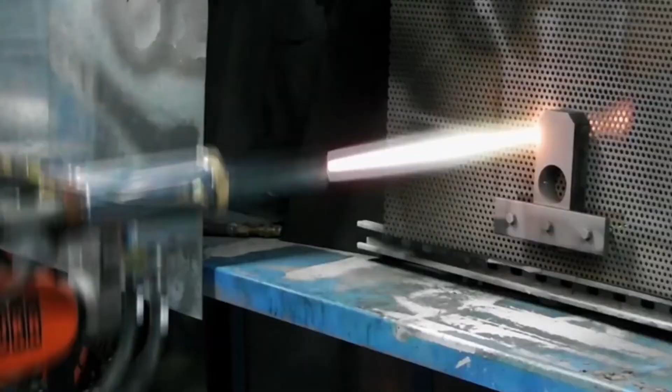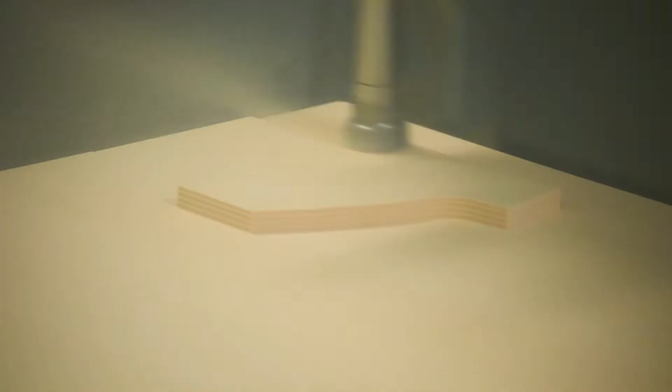Manufacturing is a vehicle to grow and sustain a higher standard of living for global communities and individual families. From increased GDP and lower unemployment to a better quality of life, manufacturing can be the answer for a multitude of complex issues. Today, technology and innovation drive growth within the sector and keep the industry current. Modern manufacturing is again changing the global economic landscape and influencing the direction of our future.

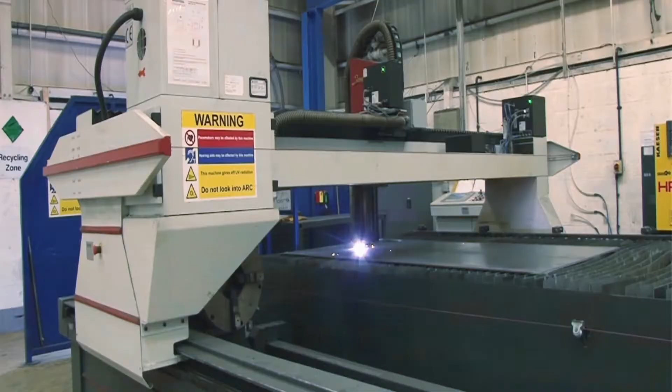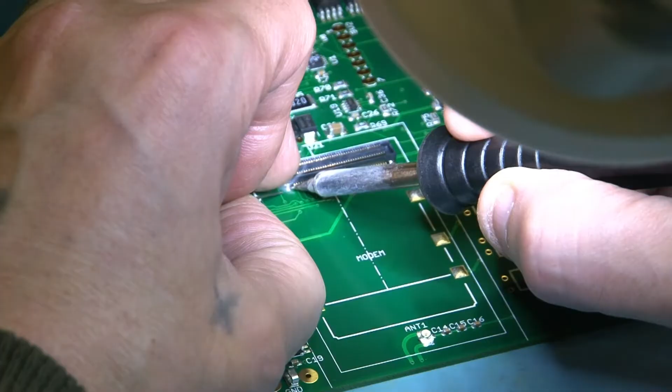The UK is home to a vast array of specialist manufacturers, all of whom are fundamental to a strong and vibrant economy. However, despite a wealth of industry knowledge, the performance of British manufacturing is dependent on many differing factors, including global events, supply and demand, a skills shortage, innovation and design, sector trends, as well as governmental direction. In the next half hour, Executive TV will explore some of these challenges with help of key industry experts.

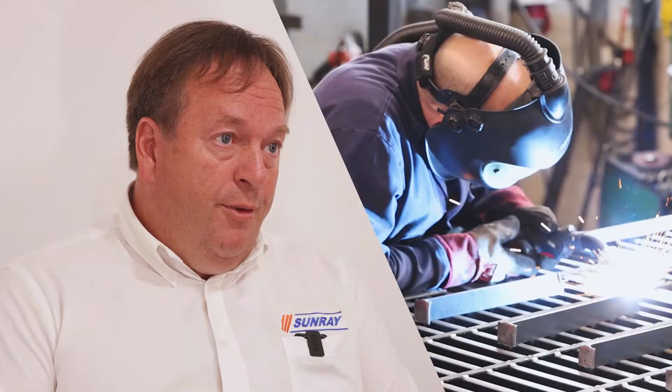Due to the global nature of modern-day manufacturing, the importance of international relations cannot be underestimated. Supply chains have grown in intricacy and complexity, so with plants and suppliers based across the world, organisations need to be aware and understand geopolitical risks.

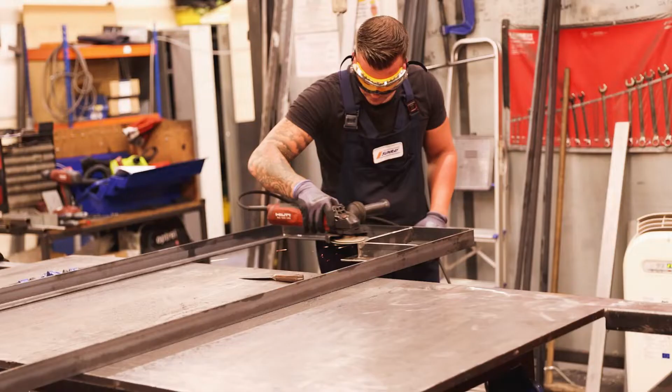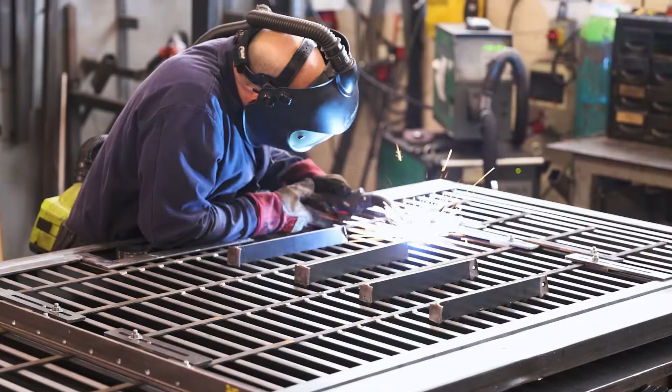We've got economic instability, we have the leftovers from the COVID pandemic, we had Brexit, and now we have rising costs, which obviously affect things like energy. So those compounded provided some real challenges for us as a manufacturer. And obviously we've had to look at them independently to manage through them, some of which are still here now. However, we are coping well. We've seen growth through a fairly challenging period. And from that point of view, it's a positive, albeit there are negatives if you look at them as a whole.

Over the years, we've seen the world become a much smaller place. People can buy from abroad. The only thing that slowed that down slightly is the pandemic, whereby restrictions were put on buying from abroad. Brexit also caused issues with logistics, sourcing, and customs. And then there are further issues like the price differentials between us and China, for instance. At one point in time, we could actually go to China and manufacture certain products at probably 50% of the cost of the UK. Fortunately, that's diluted slightly from the point of view that some of our materials are sourced from Europe, specialist materials like armoured material, when we're looking at blast and ballistics.

Logistics was one issue. The politics were another, actually getting through customs. And when you had all those sort of things together, you had some major challenges to sift through and manage.

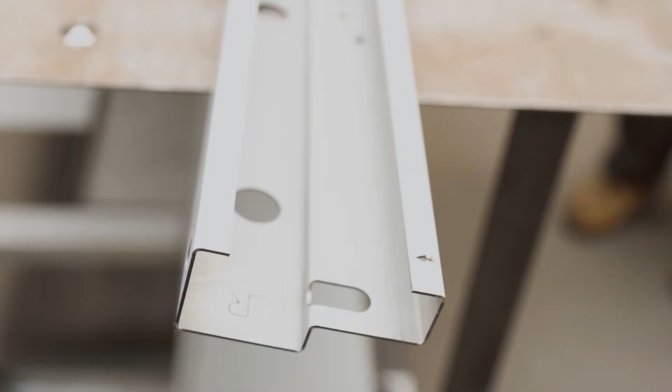The British products are well engineered. We're renowned throughout the world for the British standards, which have been around for some years, and the ethos of those products is still apparent today. However, I think it goes back to the struggles that smaller companies have to actually promote those products outside of the UK and also within the UK.

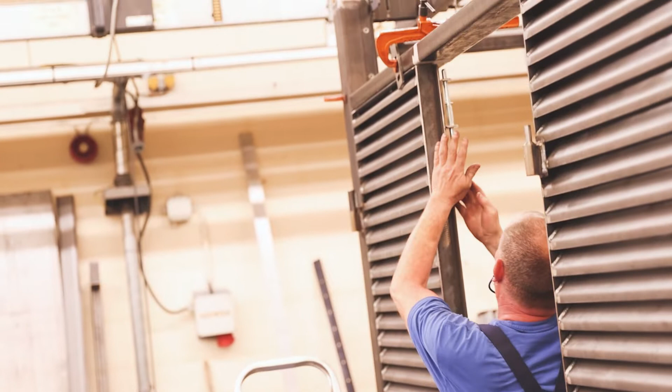We don't really export an awful lot of material to Europe. However, there are certain products that we buy in from Europe, and that tends to be more like raw materials, particularly specialist materials for blast and ballistic. That has proved a little bit more difficult with customs, again, logistical issues. There was a shortage at one point of lorry drivers. And so all these things again start to compound and affect the business.

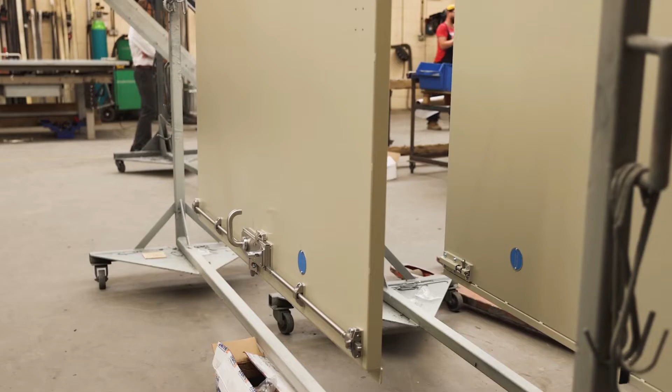I suppose the key issue for us is that we thought about that. We increased our stock holding quite dramatically to ensure that we had at least 6 months stock in our stockpiling. And that gave us the ability to not be too reliant on some of the issues that we were seeing elsewhere, but obviously feed the demand from our customer base.

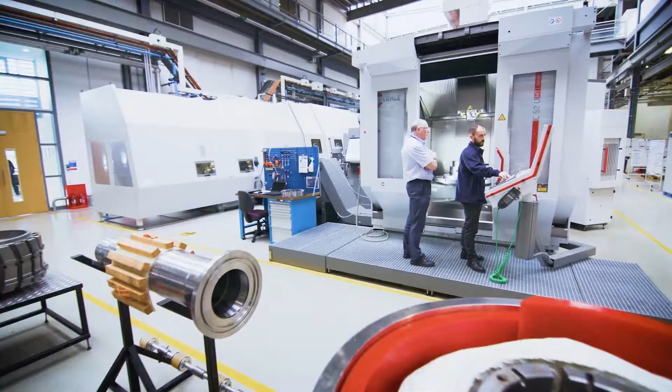In recent years, British manufacturing has been significantly impacted by economic and social challenging events, each of which causing disruption to the supply chain and manufacturing processes, and therefore reducing productivity. This has meant British manufacturers have been forced to streamline their operations and rethink their production process in order to remain competitive.

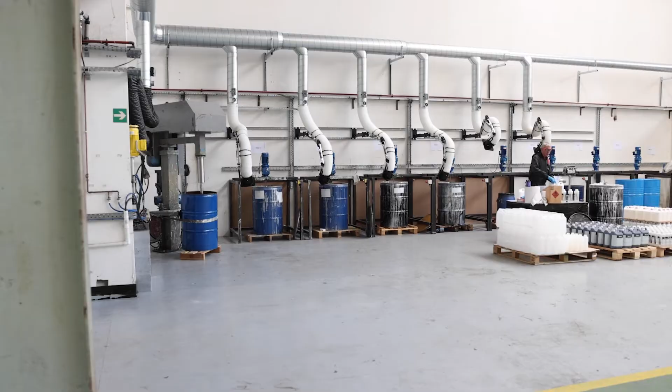When COVID hit, actually, if we hadn't run the company in a sensible way and we'd overstretched financially, we wouldn't have survived COVID, even though we were a growing company at the time. So it's taught us to be cautious. So we're cautiously waiting to see what opportunities occur.

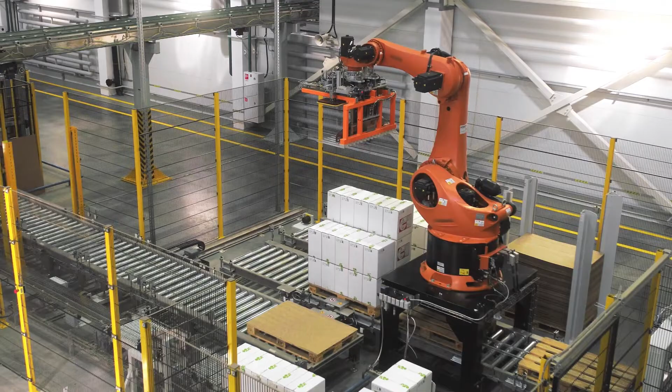Many suppliers reduced their capacity or even stopped manufacturing entirely during 2020. And then demand shot up much more than anybody really expected.

And even now, some of them are struggling to keep up with the increased demand. And as a consequence of that, prices have very much increased with all the global issues we have at the moment. It's very important to have a robust supply chain.

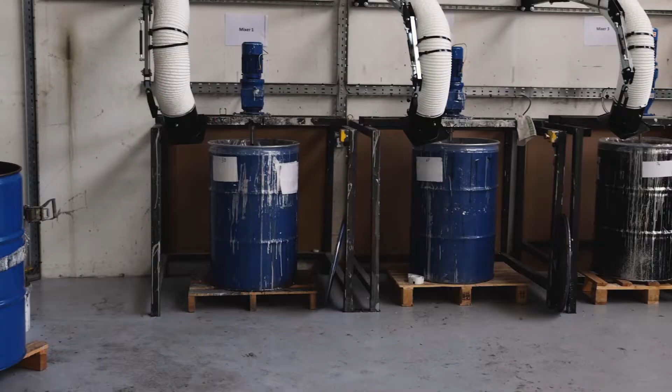We have to buy in raw materials like other companies. If for whatever reason we can't get materials, it impacts us on getting our products to market and supplying our customers, which in turn work to a short deadline. If you take a wheel off a car and refurb it, you have a couple of days to do that. If for whatever reason they don't get the product in time, it delays it for the end user.

We're in a market now where everyone wants everything the next day, wants efficiency and availability. So we try and strive to make sure that happens.

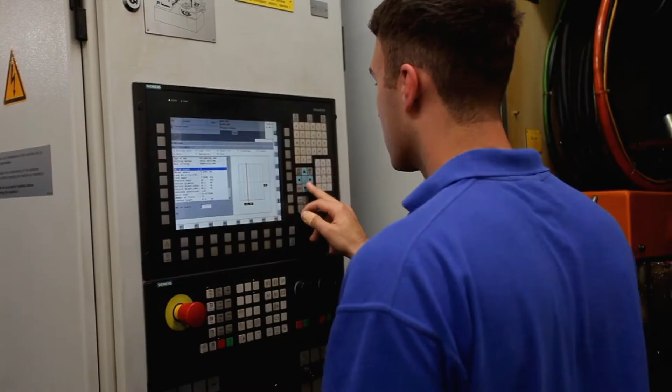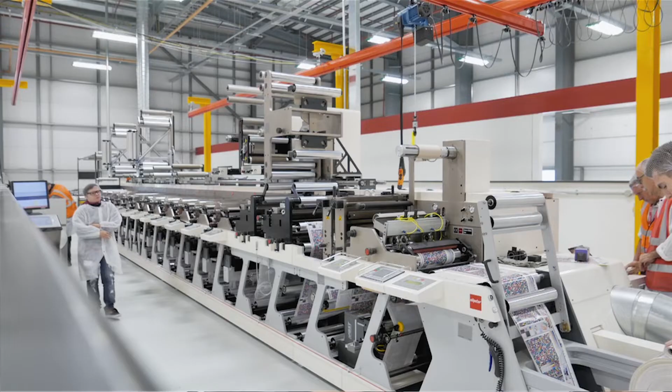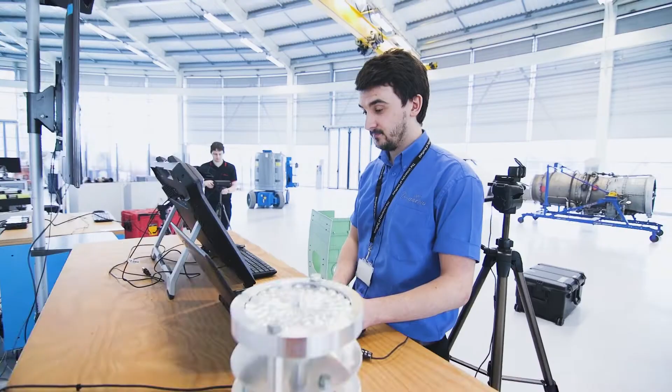Staff training and skills are fundamental to the success of any manufacturer. In recent years, British manufacturing has experienced a shortage of skilled staff, specifically in the engineering sector. Organisations have also committed to upskilling existing staff through training and development courses, ensuring their workforce continues to keep up with new and emerging technologies and the skills required in their role.

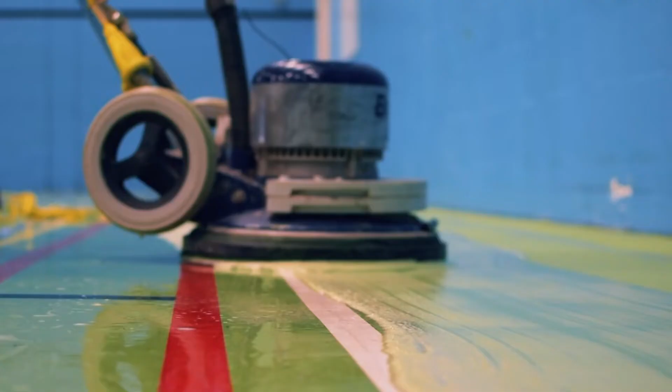Within the educational system, little information is provided for construction skills within the mainstream. The training programme that we have at Bona is an integral part of what we're doing here, and it's important for a couple of reasons.

The first one is that Bona is a real innovator, and we're really leading the way in terms of development of new systems as well as new products. The main focus that drives product development is health and safety as well as functionality, but we're also looking at improving the working practices of our contractors.

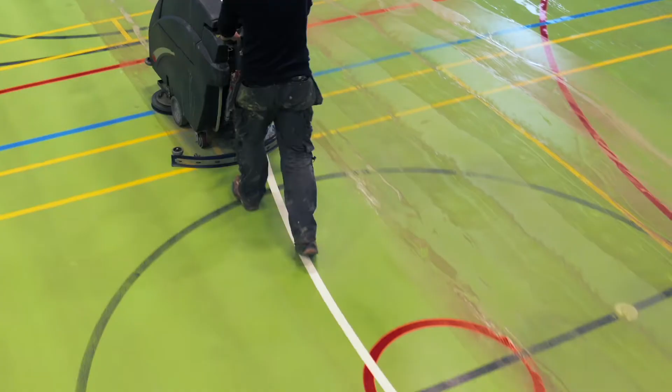So we run several different training courses. The Bona Certified Contractor Programme is aimed at our wood flooring contractors. We also run a course for the resilient system where we're treating rubber, PVC, linoleum and other surfaces like these. So they're run separately as different courses.

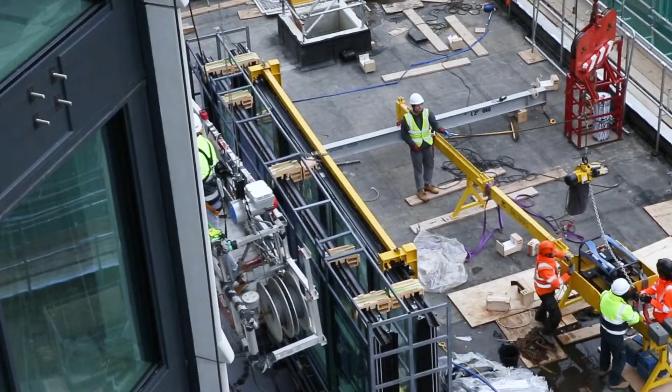The innovation aspect really drives the need for training because we're introducing new systems which our contractors have to be aware of. A secondary benefit of our Certified Contractor Programme is that it gives architects and specifiers a way of assuring the specifications they produce are carried out in the best and most practical way. So it's important for us to get our products to market, to have competent contractors to use them.

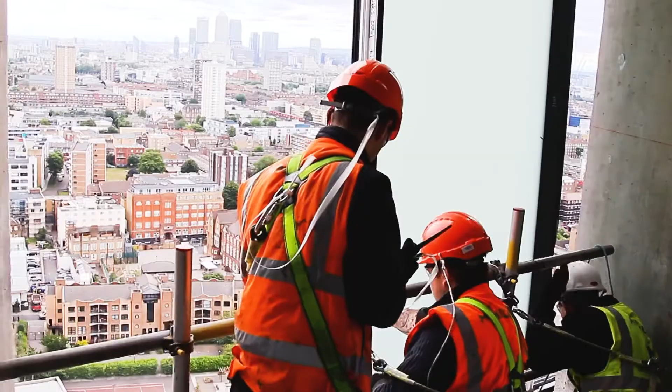It's really important that future contractors receive accurate information from the manufacturers. That's always going to be the best source of information. Unfortunately, the scenario, which is often quite common, is that experienced contractors take on younger apprentices and are therefore trained in those working practices that their boss has been exposed to.

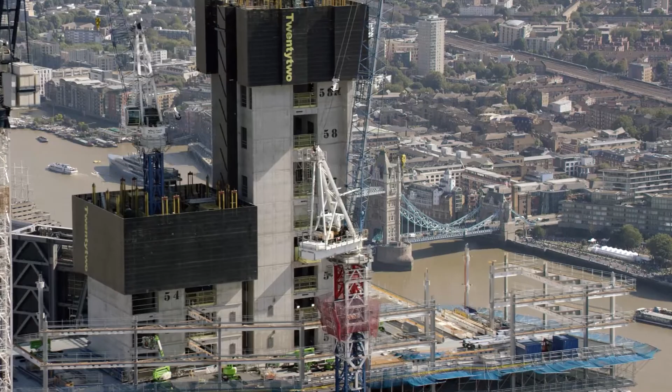So if they've had little contact with manufacturers, in other words, they're essentially self-taught, then the skills and information that they're delivering to the next generation could be quite outdated.

Installation and sanding and sealing of wooden floors is a physical job. The industry is getting older, so we need new people into that industry from schools. So we need them to be taught woodworking and carpentry. We need independent colleges like Floor Skills to do the training and apprenticeships. We need the contracting companies to do apprenticeships. And we can then take those and develop those skills.

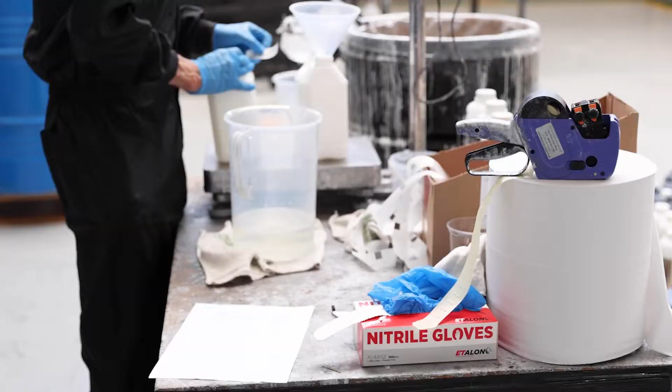Finding staff who are suitable for a very bespoke business is quite difficult. With staff, we find that a much better way is to bring people in who perhaps have little experience of the paint industry, but then we can do in-house training and tailor our requirements.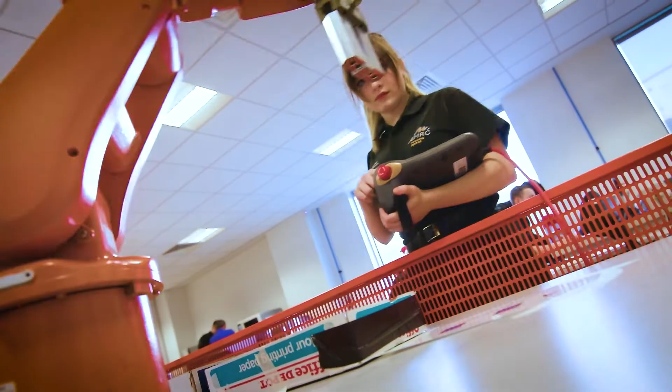We have a diversity in the UK of cultures and ability. We're technically very excellent. We have a lot of universities on our doorstep where we can tap into their expertise. And we also, being the world's 5th largest economy, have a great demand for our products in many countries too.

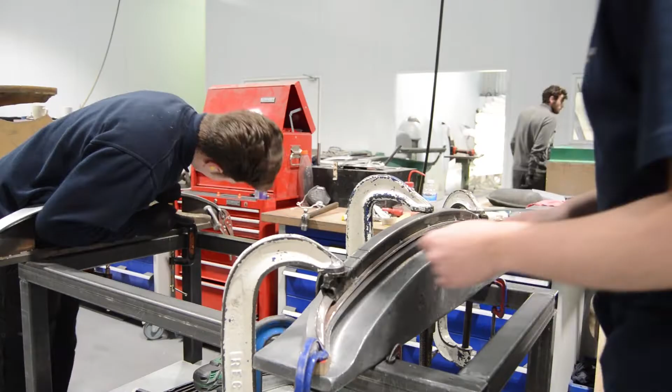There is currently a skills shortage within manufacturing. I think the colleges are working quite closely with the government to try and drive through youngsters into a more hands-on role rather than IT-based roles at the moment.

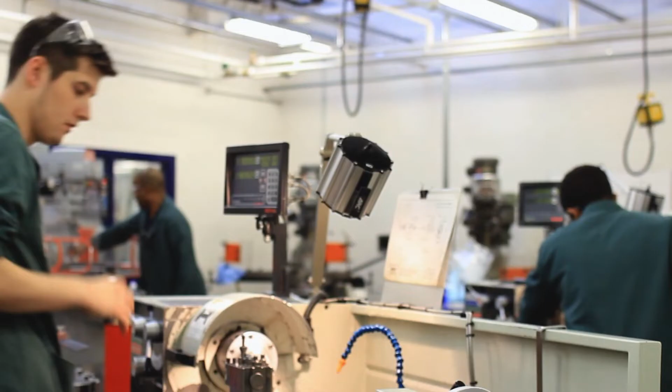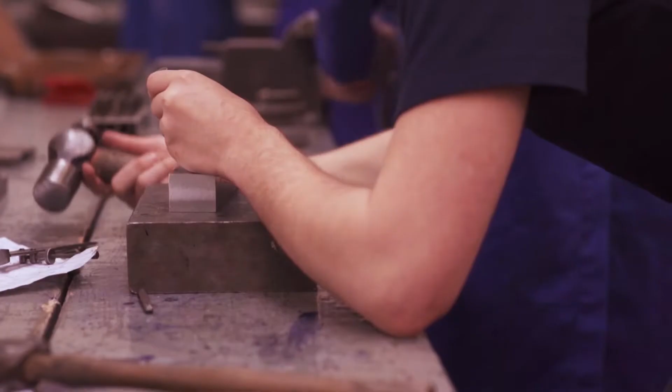What education's got to show individuals to attract them into manufacturing and engineering is the benefits of that and show them the bigger picture. They've got to encourage them at that early stage. The education sector has got to show the benefits of manufacturing and what areas can be learned, and the different techniques.

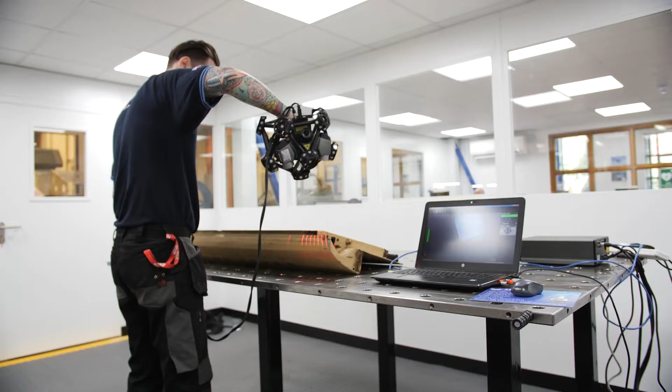I think it's probably perceived that it's a hands-on environment, but they're not possibly seeing the new technologies coming through, the new machinery advances, and they need to be made aware of those. Personally, during the early stages of secondary school, there should be more hands-on training and abilities to do woodwork, especially metalwork as well, which would then introduce them further into a manufacturing industry.

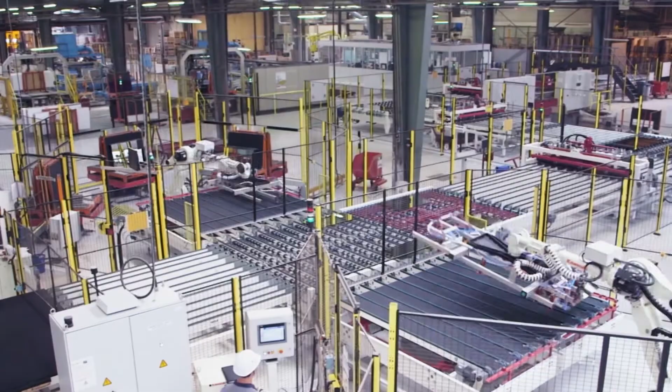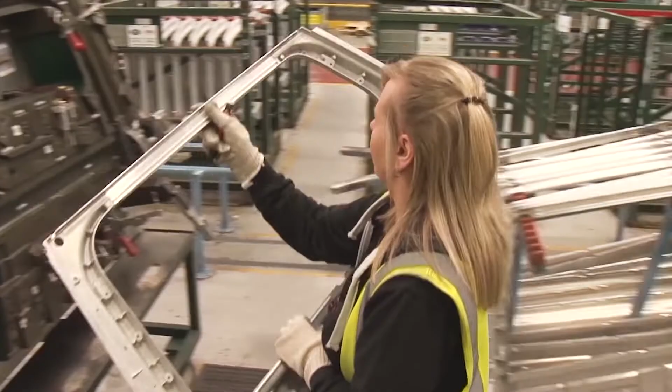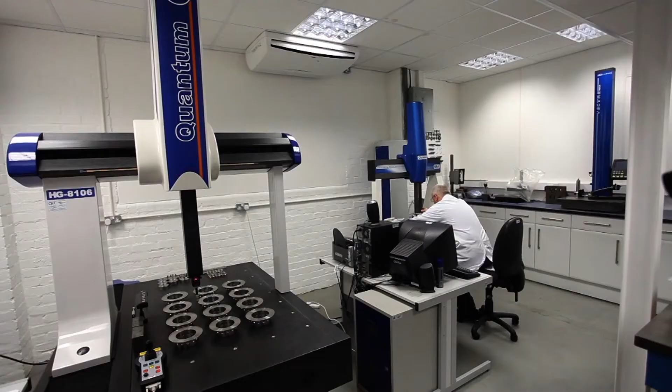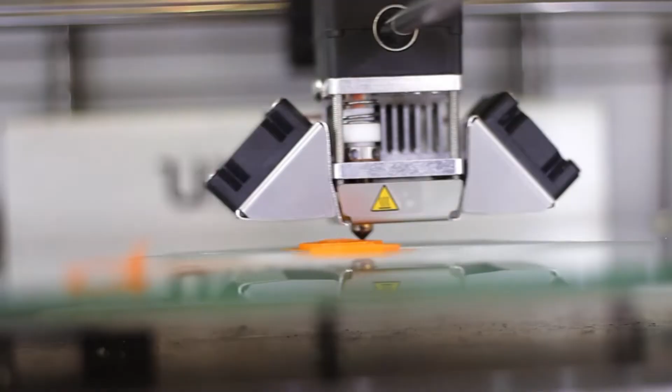The manufacturing industry has long been associated with innovation, as the industry has been revolutionised by emerging technologies. Innovation in manufacturing occurs through research and development of operational and product development processes, driven by aims of increasing efficiency and reducing costs. Forms of innovative technology which have influenced British manufacturing include additive manufacturing, a computer-operated approach to construction and industrial production, and automation, replacing the human operation of production systems with AI technology.

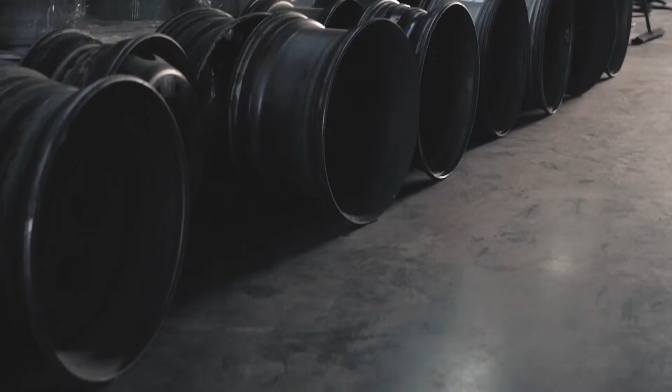Certainly some of the latest developments we've got coming through are already, this year, probably going to give us our strongest year ever from a point of view of sales and production. Moving forward, we know those products have only just started going into a small sector. They will increase. We have massive opportunities within other sectors purely because of the amount of energy they're going to save, and the speed of the process on the alloy wheel refurbishment side of things. So we see that development as a massive boost to our ability to grow as a company.

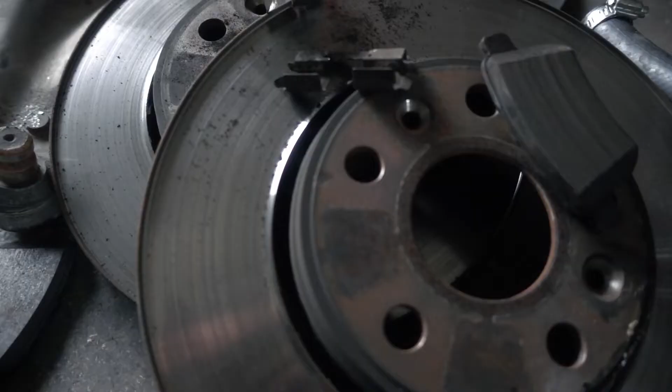Obviously, we've got to get all the systems in place, which Nilesh is working on at the moment. Over the next 3 to 5 years, I think we'll be tripling in size as a company, and potentially we will then have outlets abroad as well.

We see export as important, but at the moment we're just waiting to see how these free trade deals go, and then make a call on where we go. At the moment, Canada's quite exciting - we have some good opportunities in Canada, and we have good opportunities in the States.

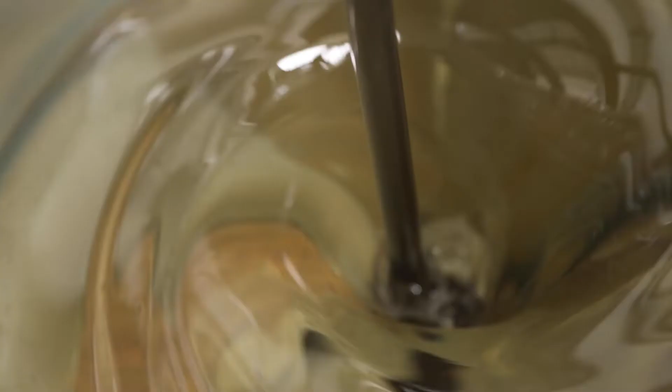Technology already is changing, driven probably primarily by energy, and energy prices going up and up, as we all know. So that drives technology for lower temperature cure products.

I think we're already seeing changes, mainly driven by two things. One is increased energy prices, where customers are looking to reduce the temperature they can use our products at. And the second is consistency of sustainability and increasingly green products to reduce customers' carbon footprints.

R&D is definitely the lifeblood of our company. Many companies look at R&D as an expensive necessity, but for us it's the only way that we can develop consistent, new, exciting products which meet our customers' needs.

Both when we started and every day, we're constantly developing new things. It's in my heart because I'm technically based, and developing new products is interesting and exciting, and seeing those brought to fruition in the marketplace.

R&D is one of those issues where you have to invest first to get the results. A lot of people see R&D as perhaps a choice - we don't. We see it as essential, because R&D ensures that you pioneer different products into different niche markets, and you look at what the market requires, the trends, the analysis, and that determines what path strategically the business takes.

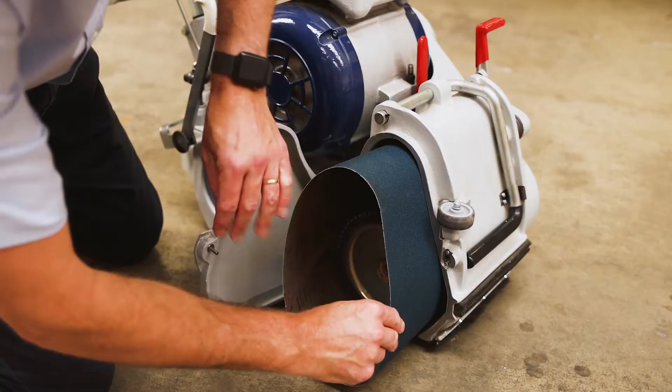Bona prides itself on innovation. In fact, it's one of our core principles. And since the 1970s, in fact 1978, we delivered the first successful water-based finishes.

This was a major innovation, and such landmarks have continued to occur regularly throughout the development of our business, such as the rejection of solvent-based adhesives, which we discontinued in 2010, well before these products were highlighted as undesirable. So we've been a key leader in altering the market for very positive developments such as these.

Others include the dust-free sanding system that we innovated, and this process will continue, again refining the health and safety of our products and our systems.

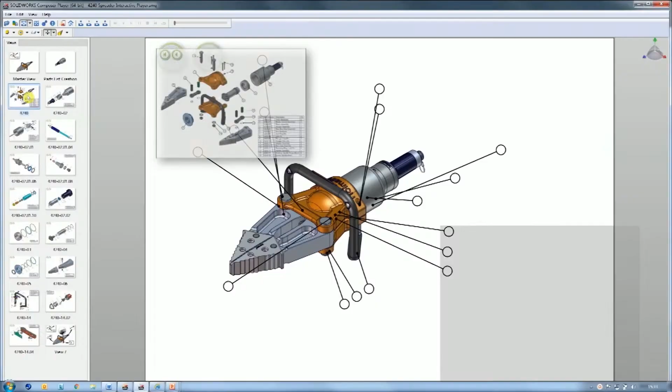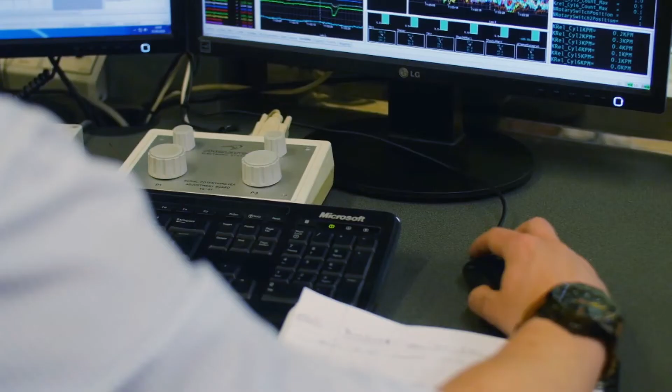Innovation also plays a key role in the design process. Design innovation relates to addressing shifting consumer needs by applying advanced technological design systems and sensibilities. Creating market opportunity and customer value is paired with a design-driven approach and strong business strategy.

Design is critical. We go through an accreditation process with our products, so everything that we manufacture is accredited by a third party, which is the LPCB. And that ensures that we manufacture to exacting standards.

Therefore, the product that we supply is fit for purpose and provides the criteria and performance that the end user requires. To actually get the certification, there's a lot of investment with R&D and obviously cost, but the sacrifice is well worth it because the end result is that we become a leader in our field, and we're providing a product that has the integrity that people expect.

The design specification requirements come from the end user or what the client requires, and also the aesthetical side. The architects like to see a nice product which is also fit for purpose.

We have two key sectors that we supply into. We do advanced colour design, and we're tier one partners with a number of very well-known automotive companies where we do automotive car colour design and alloy wheel colour development.

Our main retail is business to business, but we supply a lot of specialist products in a range of chemistries into the alloy wheel refurbishment market, which relies on matching every alloy wheel you see out there - it's painted, and we need to match and replicate those colours and enable our customers to refurbish the wheels as if they're brand new again.

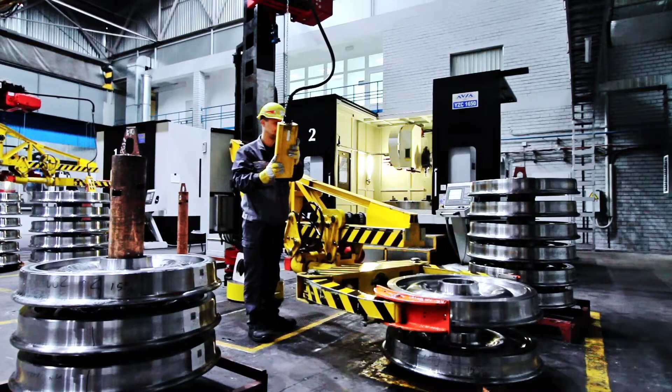We have a range of chemistries that allow our customers to do that, and we supply some customers who are doing tens of thousands of wheels a month down to people who are doing a single wheel a day in a van. So we have a range of products that suit all those market sectors.

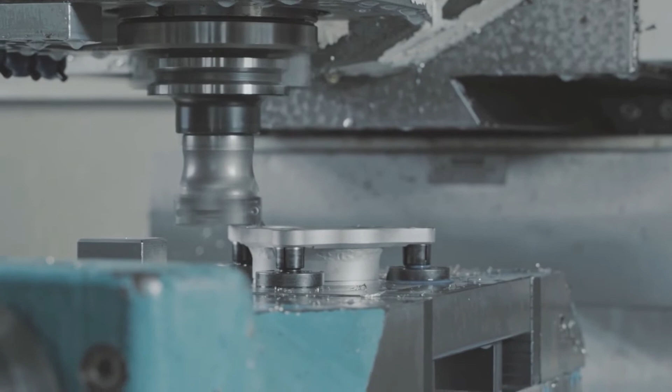The trend of the environmental agenda has influenced many sectors of the business world, including the manufacturing industry. Manufacturing has been labelled as a significant contributor to global carbon emissions. Therefore, British organisations have been focused on developing more environmentally friendly practices to reduce their environmental impact.

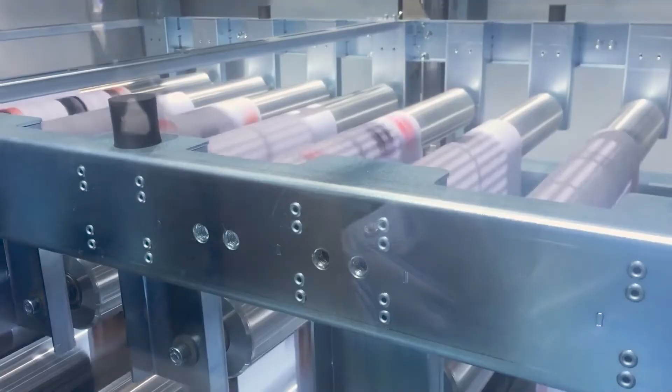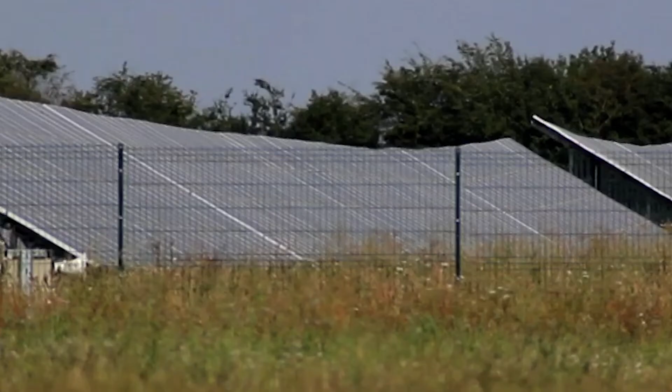One way in which British manufacturers have transitioned to a green approach is through the utilisation of sustainable materials and energy. Sustainable manufacturing can be achieved through powering operations with energy generated from natural resources, while ensuring effective waste management of raw materials, such as recycling and biological reprocessing.

I think the wider trends in the industry going forward are going to continue on the sustainability messaging, as well as high performance products. This is a primary focus for Bona. I expect development to continue in terms of producing more sustainable solutions, including cleaner and more effective products. This is a key principle of Bona and is something that's likely to continue.

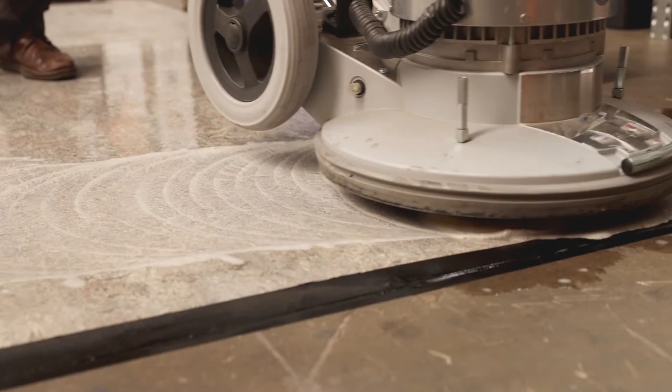Also, I can see an increased need for refurbishment of surfaces rather than replacement. I think this is going to come under increased focus, and as raw materials become less available, there's going to be even greater need to refurbish these surfaces rather than replace them, in terms of costs and downtime.

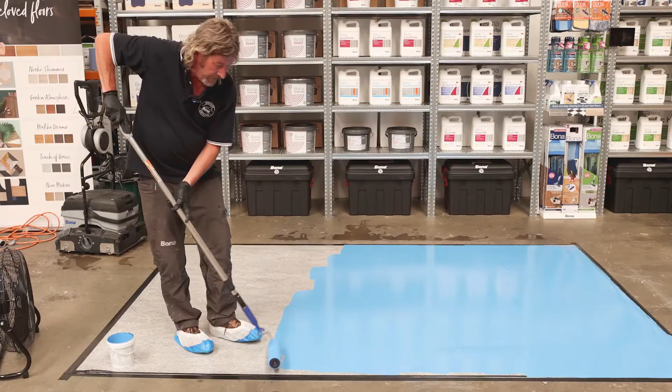In the future, I predict an ongoing development in terms of cleaner and more effective products. So it's going to be really important that we keep on top of the training and provide that information to our customers. As for what challenges we face in the future, I think sustainability is going to be a really important aspect. And as with the resilient system, where we're extending the life of existing surfaces, we've been doing this with wood flooring for a long time.

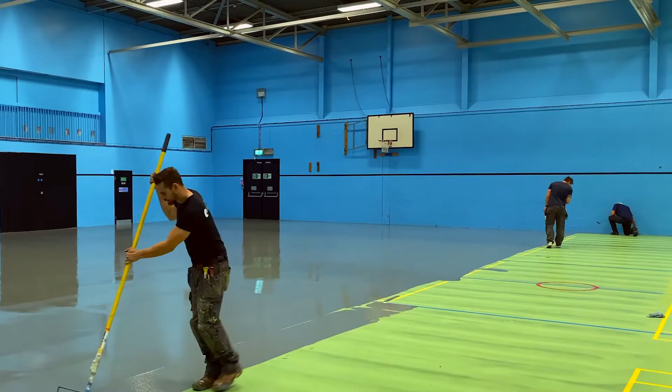And this is going to become an increasingly important aspect of our business. Wood is a sustainable resource if managed correctly. The timber that we use within wooden flooring for the surface material could take 50 or 100 years to grow to the point that it can be used on a floor. To make it fully sustainable, we really should be looking to extend the life of floors by protecting them fully.

Bona has made great strides towards making the cleanest, greenest products. What I would like to see within the industry is actually some of the less green products removed from sale, because why should we still be selling these products? Sustainability is very important because the world is getting hotter and we need to do something about emissions of all products. So if everybody can take a good stance in their emissions from products, we put the planet in a better place.

It's amazing how many people don't know that their floors can be renovated. So what we're looking to do is to educate and train people how to restore floors, to give them extended life, to save them money.

We're always looking at recyclable packaging and products that are going to be better for the environment. We're currently working on products that will reduce energy costs for an end user, as well as more innovative products. JT's committed to producing as green a product as possible.

We are very much helped by partnerships with our raw material suppliers, who are constantly innovating with new materials which can produce lower energy usage and also produce less organic vapour into the atmosphere. So we are very much in partnership with those companies and also driven to producing those in the marketplace, and that's one of the reasons why R&D is so important to us.

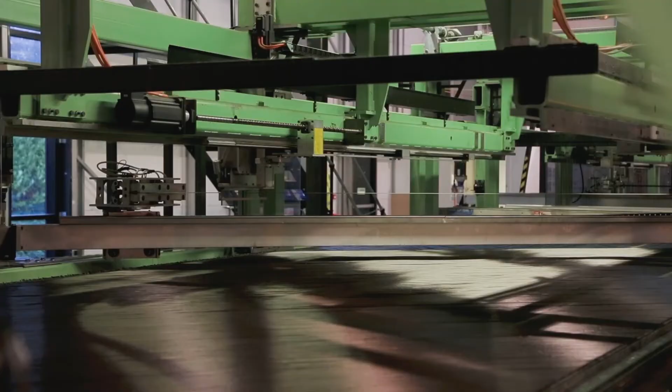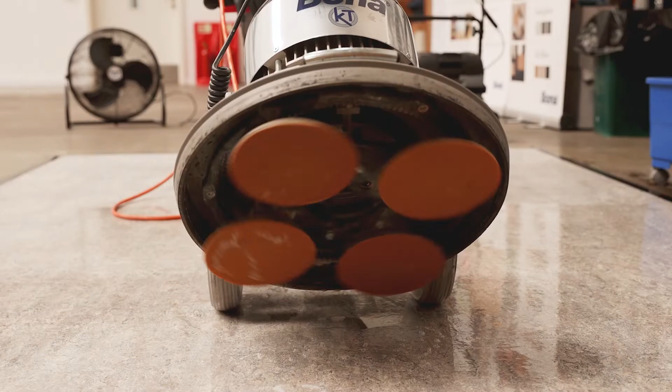As the government announced its commitment to a net zero economy, regulations and incentives have been implemented, which have influenced manufacturing organisations' decision-making. However, government involvement within the industry is not limited to environmental responsibility. The government position of net zero is great because it will push people to look at CO2 emissions, and this directs them towards more environmental products.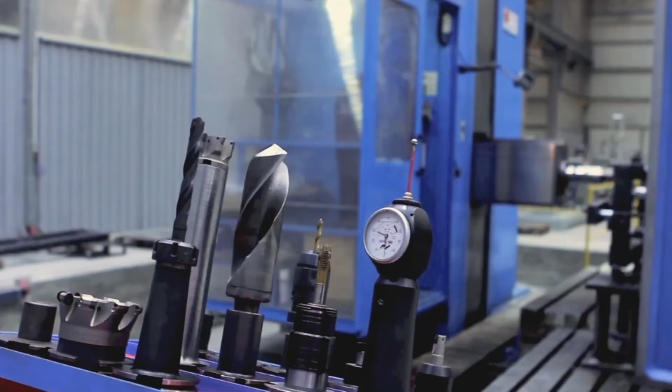If you take something like our new resilient system, recoating a vinyl floor reduces CO2 emissions by 90% compared to replacing that material. With British businesses continuing to face current harsh economic conditions, concerns have been raised as to whether the government is doing enough to support manufacturers, as their performance is essential to the UK's economic recovery.

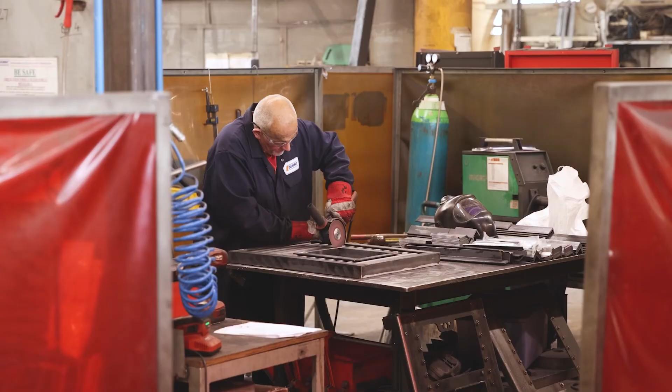There's a lack of investment from the government. Obviously, corporation tax is a bugbear for most businesses, and we class ourselves as a growing SME. So from our point of view, any costs that could be supported by government, or even looked at from a point of view of rebate or business support, would certainly give manufacturing in general a supporting arm, which at the moment seems to be lacking from the government.

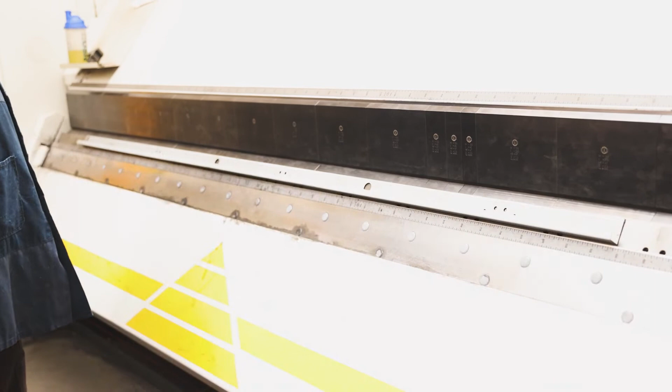I'm not sure their focus is really on what I would say the true SMEs that were once a sort of the stronghold for the UK.

Waiting to see which way the government goes with free trade deals, and also what incentives they offer to companies as well, because obviously it's expensive. We don't want to be borrowing money to have the expansion. We want to be doing it within our own financial abilities, because that's how we've grown as a company.

Had we not been sensible and run the company in a sensible way, and actually held reserves, we would have been much more severely affected by COVID.

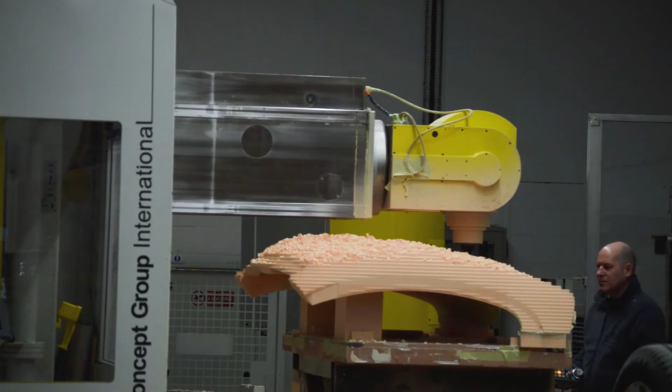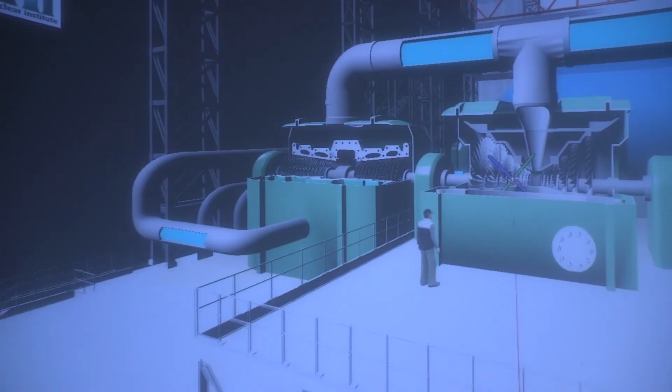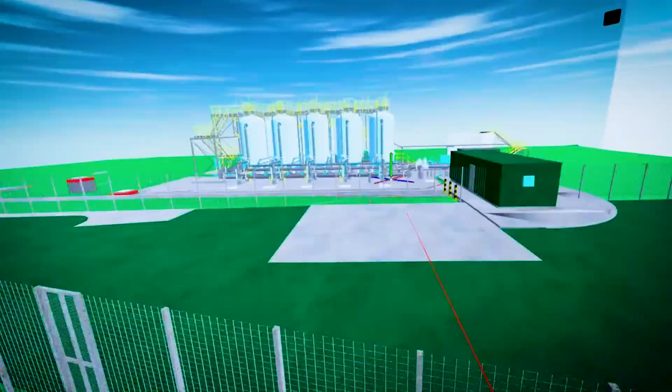Manufacturing continues to be one of the most important sectors of British business, not just because of the goods provided for the marketplace, but also the impact on the economy in general. As manufacturing processes continue to develop through innovation, the skills and expertise required have also developed. With this trend, as well as others, such as the environmental agenda, set to continue, it gives us an interesting insight as to what the manufacturer of the future will look like.